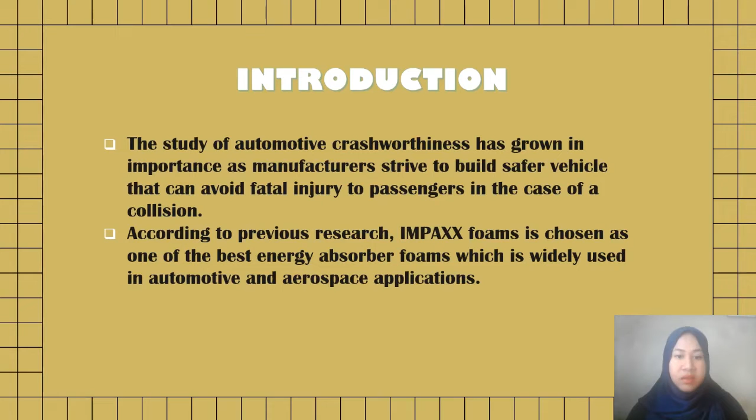Next is the problem statement. Vehicle crashworthiness can be improved by using energy-absorbing foam. There are many studies of crashworthiness of vehicles found in the literature. However, there is limited public research on using IMPAXX EPS foam for impact energy absorbers for vehicles.

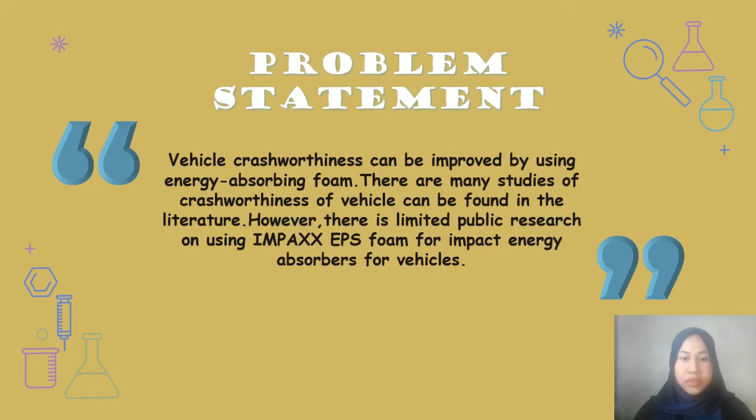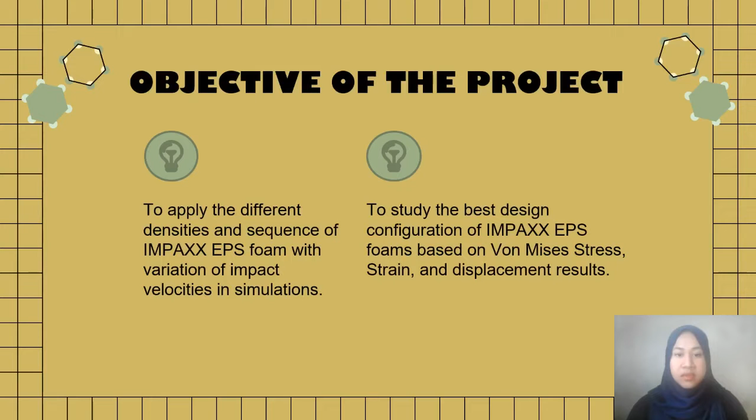In this research study, there are two objectives. First, to apply different densities and sequences of IMPAXX EPS foam with variation of impact velocity through simulation. Second, to study the best design configuration of IMPAXX EPS foam based on von Mises stress, strain, and displacement results.

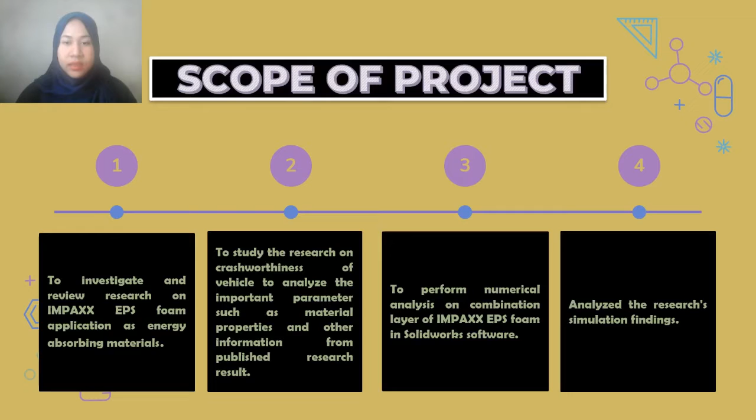Next is the scope of the project. First, to investigate and review research on IMPAXX EPS foam application as an energy-absorbing material. Second, to study the research on crashworthiness of vehicles to analyze important parameters such as material properties and other information from published research results. Third, to perform numerical analysis on combination layers of IMPAXX EPS foam in SolidWorks software. And lastly, to analyze the research simulation findings.

Then we move to the literature review. This study will focus on Dow Automotive's closed cell energy absorption foam material, since it is a highly engineered polystyrene-based thermoplastic foam. IMPAXX foam is created through an extrusion process combined with a blowing agent and other additives. IMPAXX foam is commercialized in three grades: IMPAXX 300, IMPAXX 500, and IMPAXX 700. It has a closed cell structure, and is known for being lightweight with good impact energy absorption.

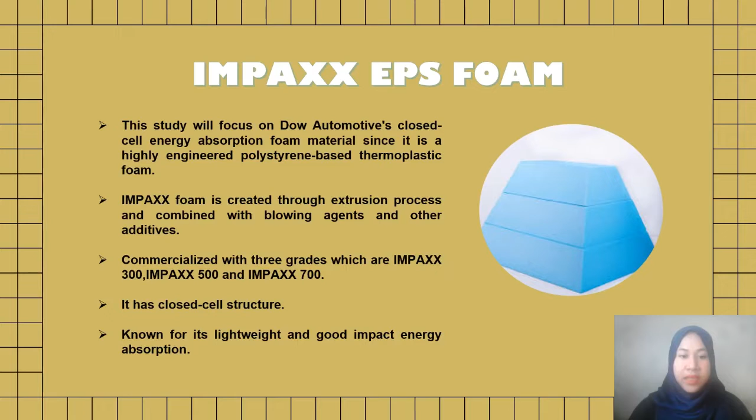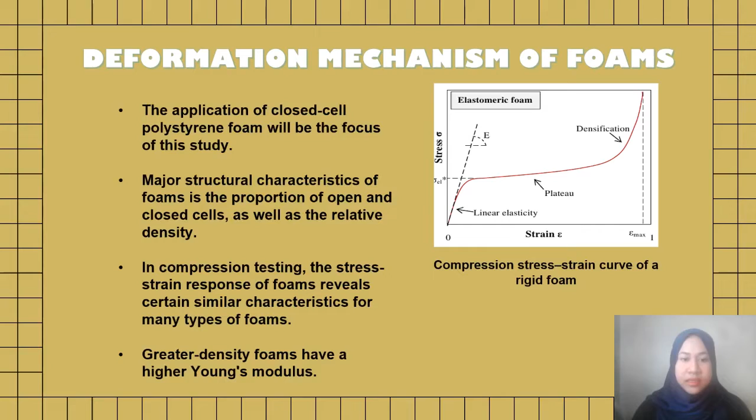Next is the deformation mechanism of foams. The application of closed cell polystyrene foam will be focused on in this study. A major structural characteristic of foam is the proportion of open and closed cells as well as the relative density. In compression testing, the stress-strain response of foam reveals certain similar characteristics for many types of foams. Foams with greater density have higher Young's modulus.

Next is the stress-strain curve of IMPAXX EPS foam. The figure shows the quasi-static stress-strain curve of IMPAXX EPS foam. The material is characterized as a high-efficiency energy absorber because the stress-strain curve is almost a block curve, and good absorbers show a square wave response.

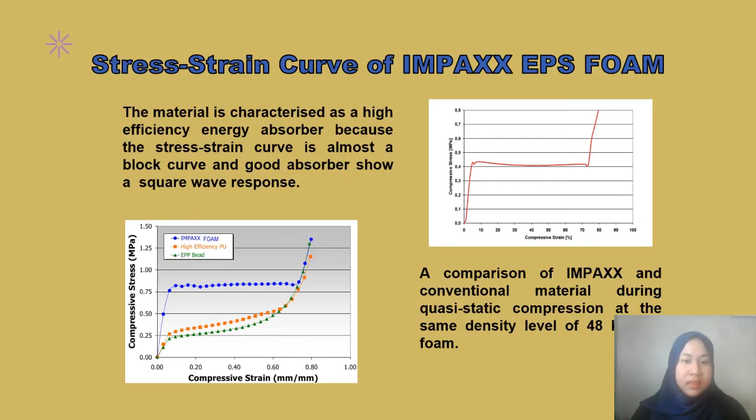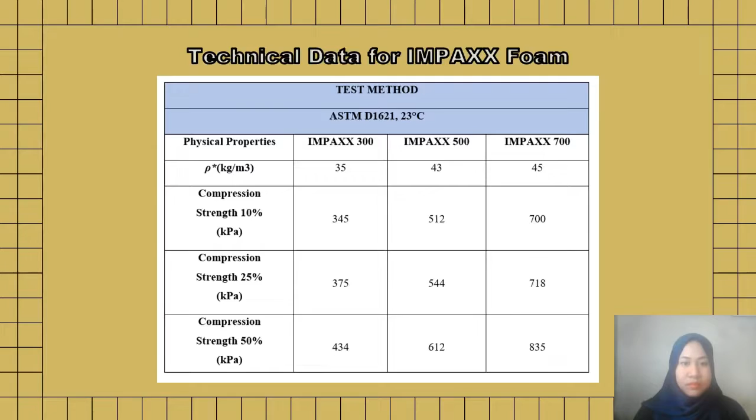As for material modeling, the parameters required to develop the model for each foam are length, width and thickness. The values of the parameters are: length 107 mm, width 107 mm, and thickness 55 mm. The figure shows the density of the IMPAXX foam.

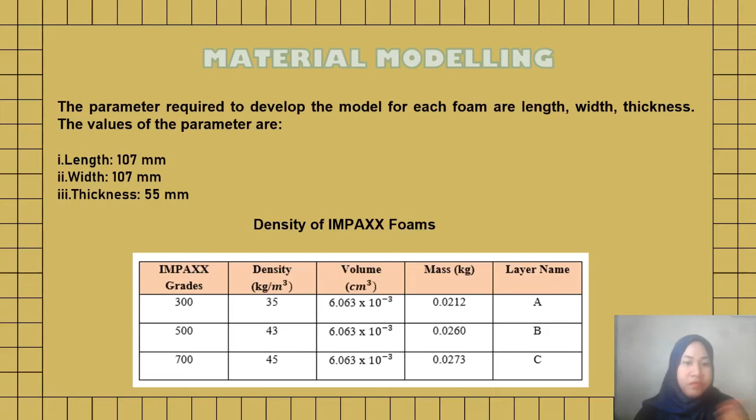Then the foam will be simulated as stacked layers with various density configurations. The six combination layers, which are ABC, ACB, BAC, BCA, CAB, and CBA, will be modeled in SolidWorks software.

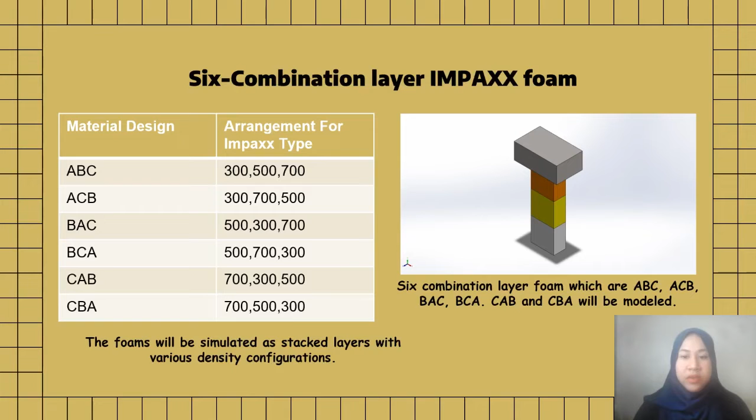After done the 3D modeling, simulation of impact tests were conducted. The finite element model of impact test is developed in SolidWorks software. It consists of a foam model, an impactor, and a fixed plate.

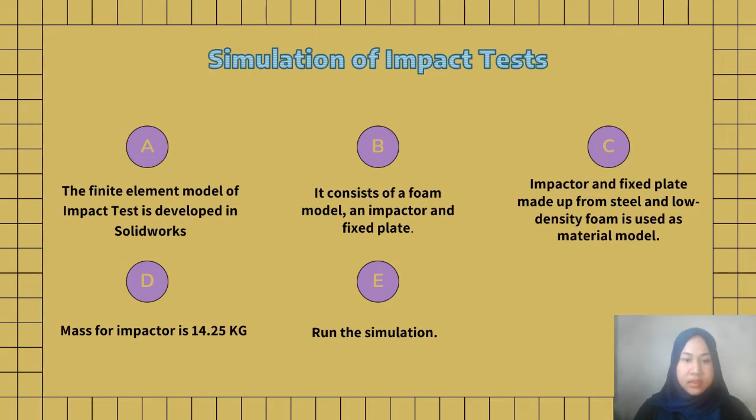Impactor and fixed plate are made from steel, and low density foam is used as the material model. Mass for impactor is 14.25 kg. After completely filling in the parameters and completing the meshing process, the simulation for impact test will be run.

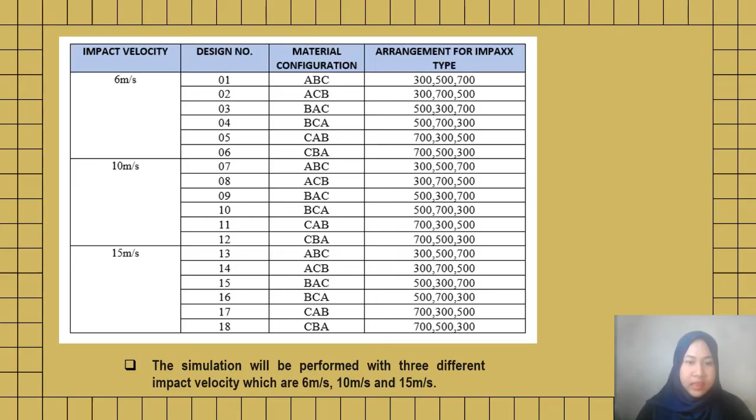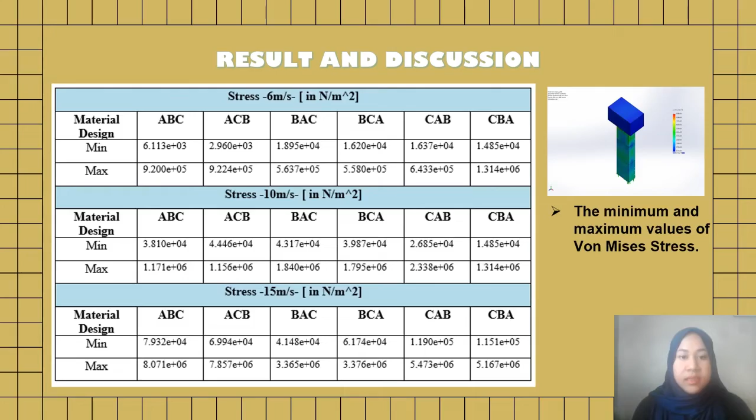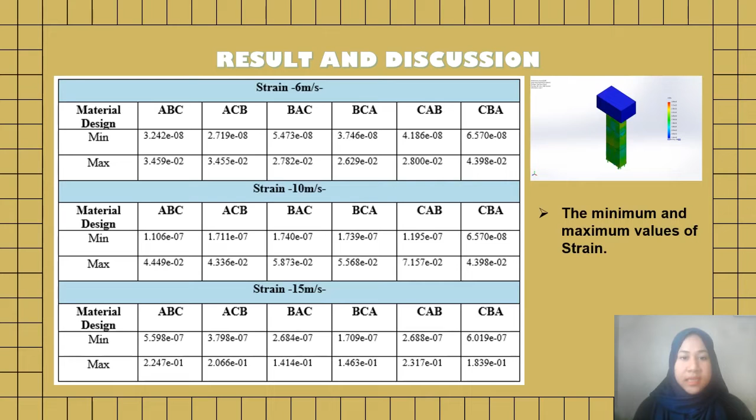As we can see, the minimum and maximum values of Von Mises stress for material design CBA are the same when impacted at velocity 6 meter per second and 10 meter per second. This table shows the minimum and maximum values of strain. All the data is obtained from the simulation result.

However, at 10 meter per second of impact velocity, the material design CAB produced a high value for Von Mises stress, and the lowest value is material design ACB.

When the layered foam is impacted at 15 meter per second, the maximum Von Mises stress of material design ABC and ACB is about the same with not much difference. This situation may occur due to many aspects and mesh size.

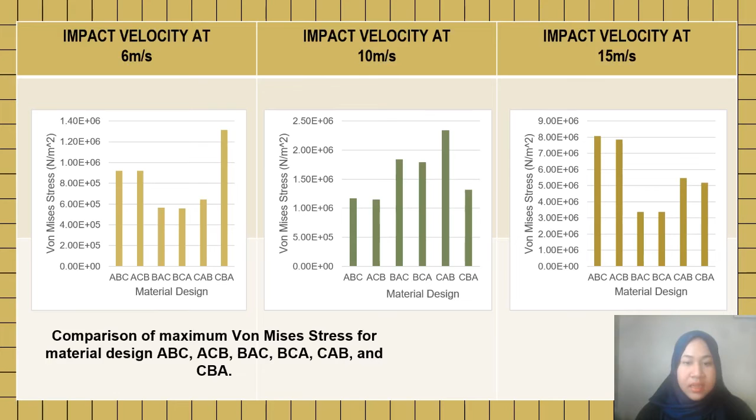When the simulation is run, there is some effect of design on mesh size. The mesh size may be too small or difficult to control.

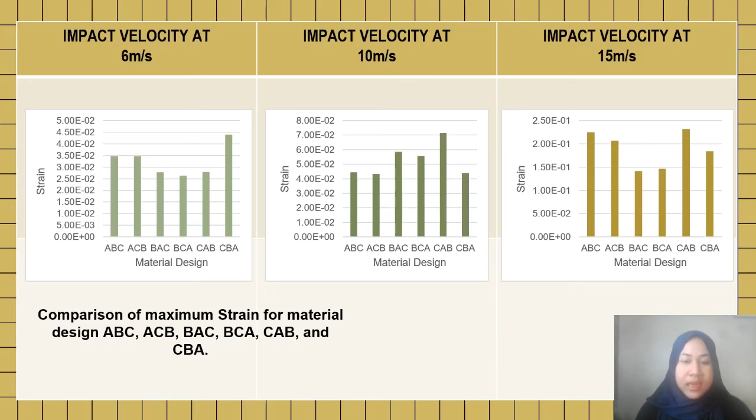Based on this finding, the study concluded that the highest value of strain occurred on combination layers of the material design that included a component of material C.

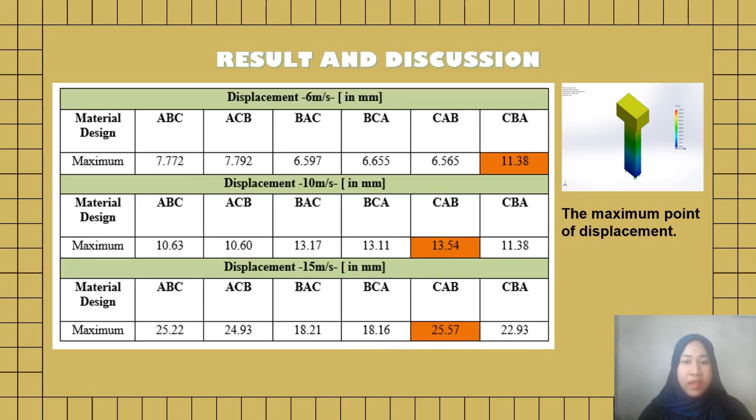After that, this is the result of the maximum point of displacement for every impact velocity. As you can see on the graph, the highest displacement result for impact velocity at 6 meter per second is material design CBA, which is 11.38 mm. It is slightly higher than other material designs.

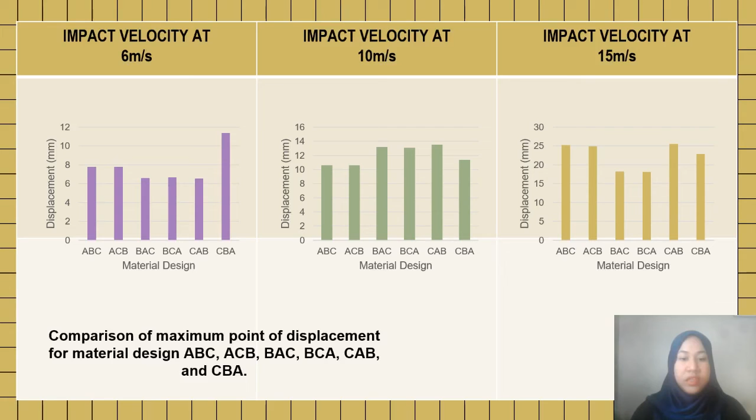For impact velocity at 10 meter per second, material design CAB produced the highest displacement, which is 13.54 mm, while at impact velocity 15 meter per second it is material design CAB with 25.57 mm.

As for conclusion, the objective of this research study has been successfully achieved. It has been discovered that material C should be placed in the middle or top position compared to material A and C to achieve the best result.

Material C has a significant impact on material combinations. Material C should be placed in the middle or at the top of the design configuration for maximum optimization. To sum up, material design ABC, material design CAB, and material design CBA were selected as the best design configurations.

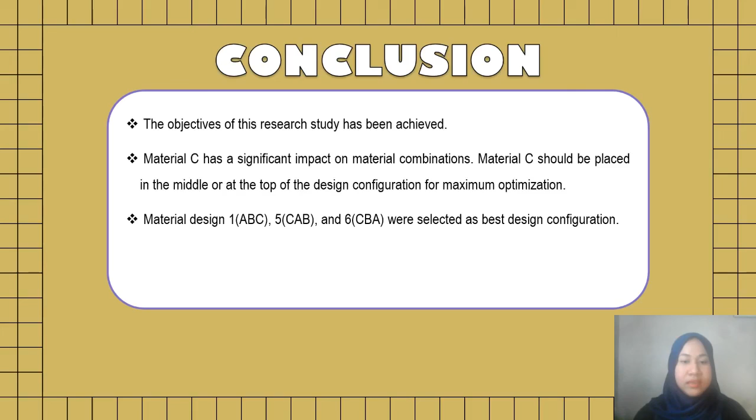And lastly, all the material designs are safe, since the value for maximum Von Mises stress is less than the value of yield strength. Last but not least, some recommendations were made through the experience gained from this research for future consideration.

First, conduct mesh size analysis to see how mesh density affects the simulation result. This is an important task because it will reduce the computation cost without compromising the simulation result accuracy.

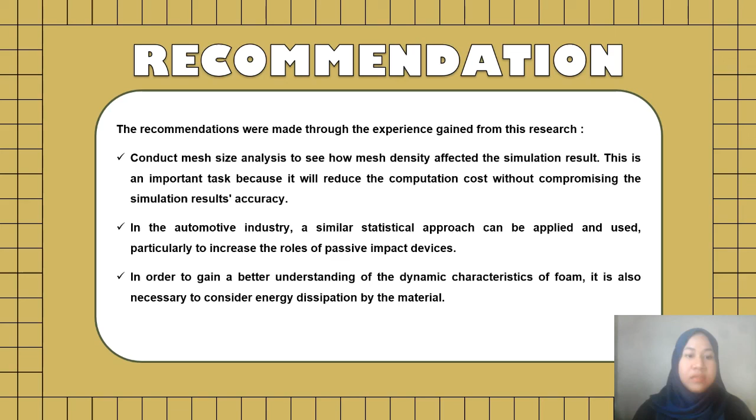Second, in the automotive industry, a similar statistical approach can be applied and used, particularly to increase the role of passive impact devices. Lastly, in order to get a better understanding of the dynamic characteristics of foam, it is also necessary to consider energy dissipation by the material.